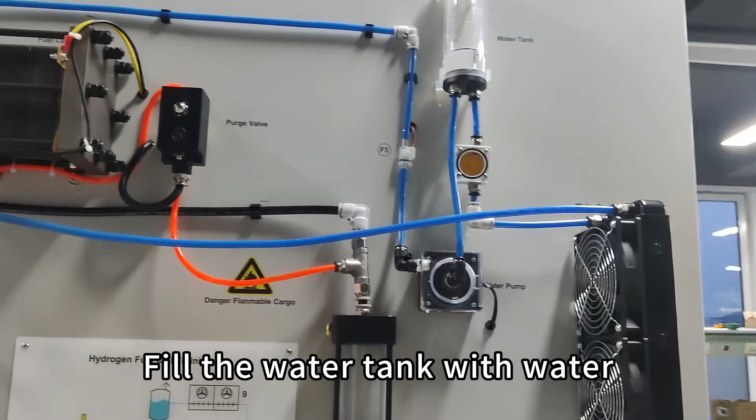Following is a test of the fuel cell. We need to fill the hydrogen tank with hydrogen and then adjust it to the appropriate pressure. The pressure should be less than or equal to 0.5 bar. Fill the water tank with water.

Adjust the electronic load clockwise to the maximum, which is 12 ohms. Next, power on. Here, I also pair this software. All are OK. The software uses a network cable to connect the communication port on the right side of the device to the communication port of this computer.

This is a software CD. It also comes with a USB network card, which can be used if the computer does not have a network port. Next we start from the touchscreen.

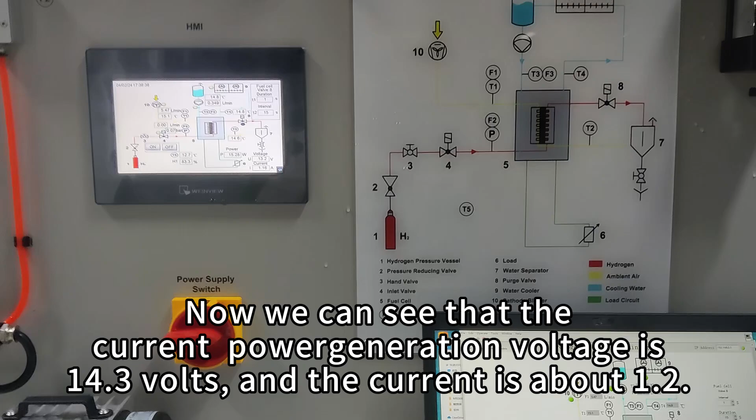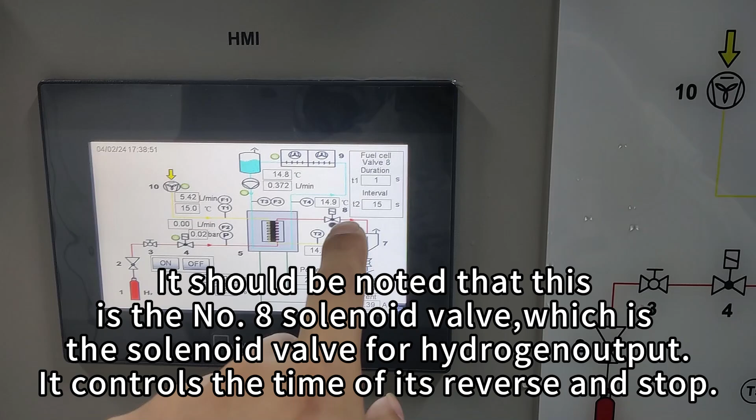Now we can see the current power generation voltage is 14.3 volts and the current is about 1.2. It should be noted that this is the number 8 solenoid valve, which is the solenoid valve for hydrogen output. It controls the time of its opening and stopping. Now it is on for 1 second, then closed for 15 seconds, then on for 1 second, and then closed

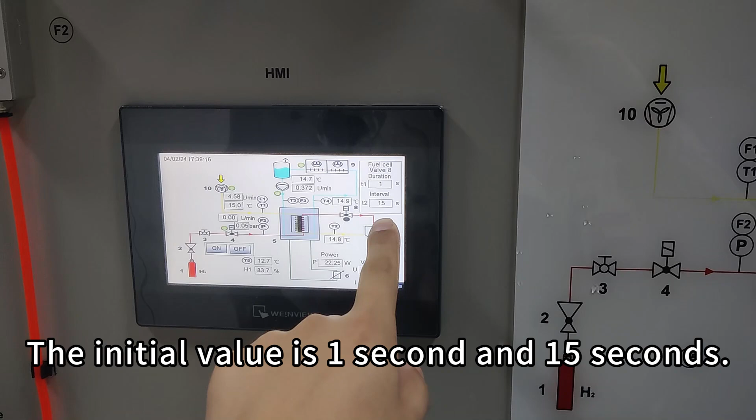for 15 seconds. It must ensure that after the hydrogen and oxygen react inside, when the concentration becomes lighter, it will be discharged again. The initial value is 1 second and 15 seconds. We can adjust it through the panel, and it can also be adjusted to 10 seconds. It can also be adjusted to 2 seconds here.

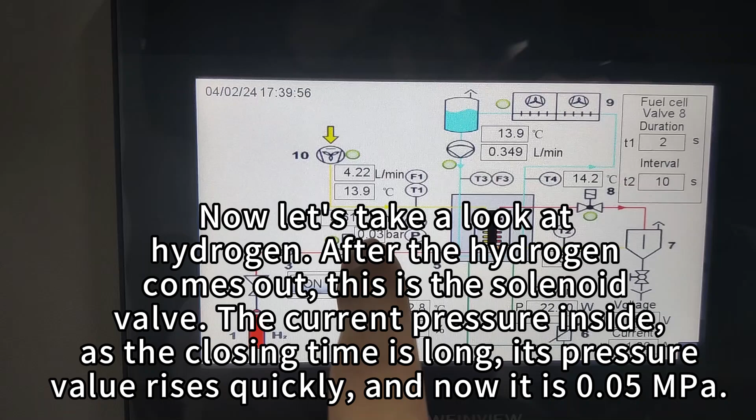Some current electrical parameters such as voltage and current will be displayed here. We can take a look at the current, voltage, and other parameters. Now let's take a look at hydrogen. After the hydrogen comes out, this is the solenoid valve. The current pressure inside, as the closing time is long, its pressure value rises quickly, and now it is 0.05. When the solenoid valve is open, the flow can enter, so the flow will flow out.

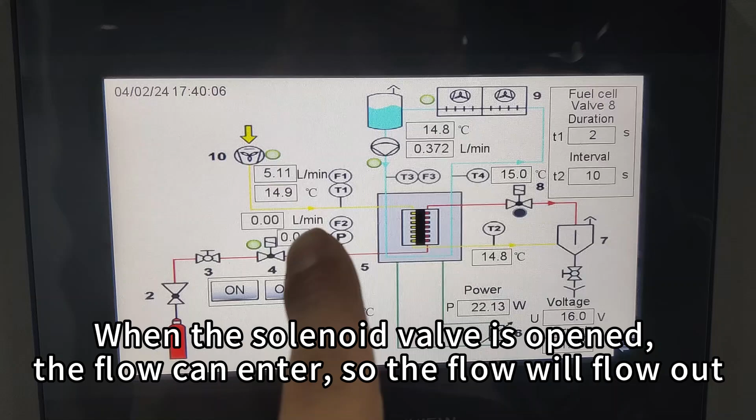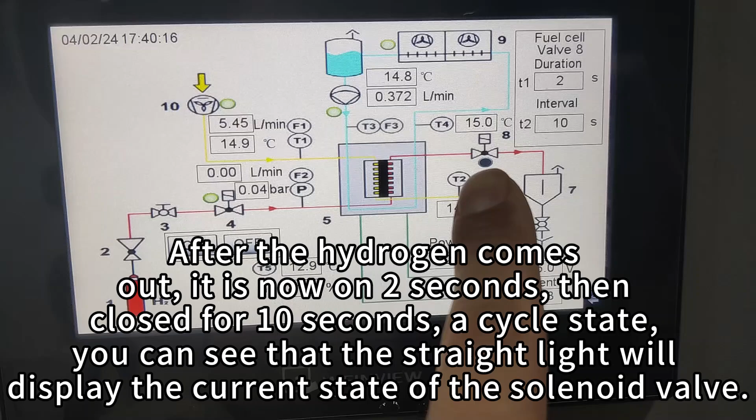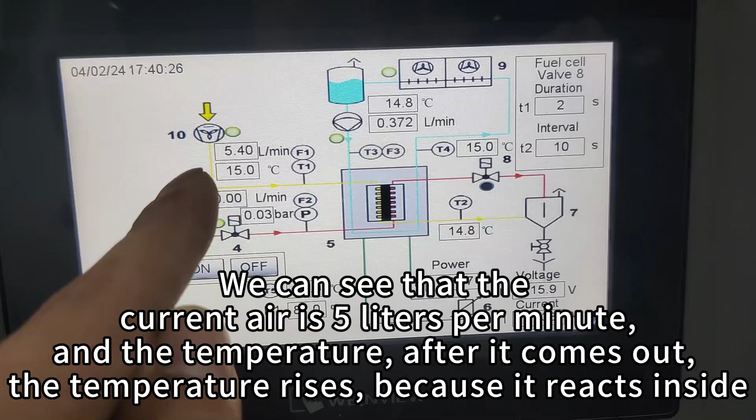After the hydrogen comes out, it is now on 2 seconds, then closed for 10 seconds, in a cycle. You can see that the light will display the current state of the solenoid valve. We can see that the current air is 5 liters per minute, and the temperature, after it comes out, rises because it reacts inside.

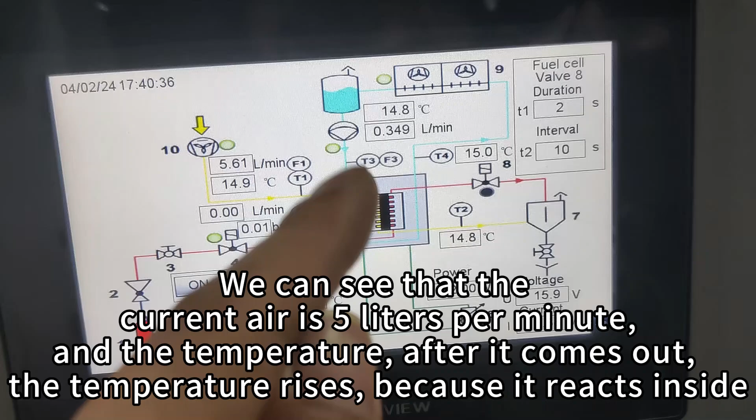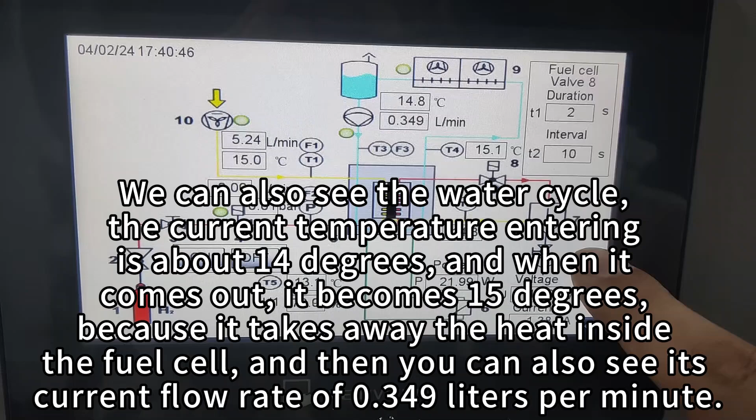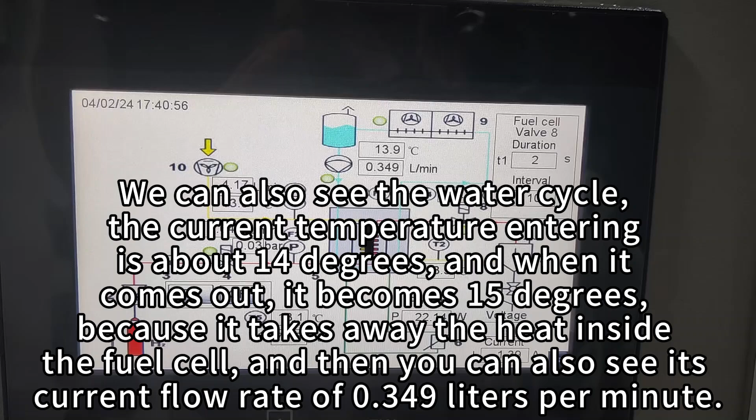We can also see the water cycle. The current temperature entering is about 14 degrees, and when it comes out, it becomes 15 degrees because it takes away the heat inside the fuel cell. And then you can also see its current flow rate of 0.349 liters per minute. We can also see here that humidity in the current room is 76.6%, and the current indoor temperature can be seen here.

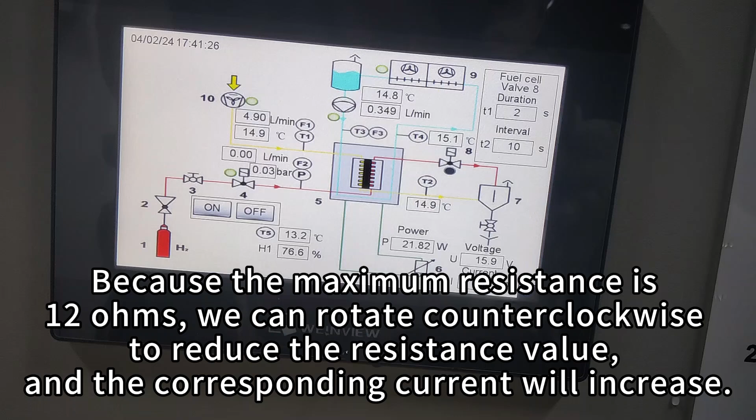Current electronic load current, voltage, power, and other electronic parameters will also be displayed here. Because the maximum resistance is 12 ohms, we can rotate counterclockwise to reduce the resistance value, and the corresponding current will increase. As we reduce the resistance value, the current will reach about 5 amps, and with a current of about 5 amps the power will reach about 60 watts.

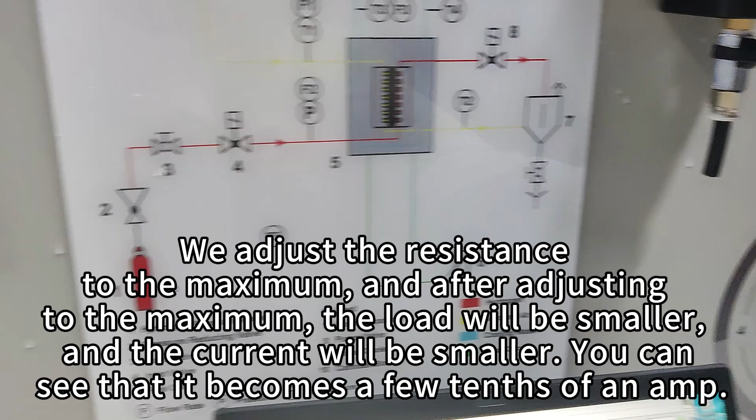But it will have this instantaneous voltage reduction because we are now connected to the hydrogen tank. We are using a hydrogen generator, and its hydrogen supply is limited, so when there is a large load, it will disconnect. We adjust the resistance to the maximum, and after adjusting to the maximum, the load will be smaller and the current will be smaller. You can see that it becomes a few tenths of an amp.

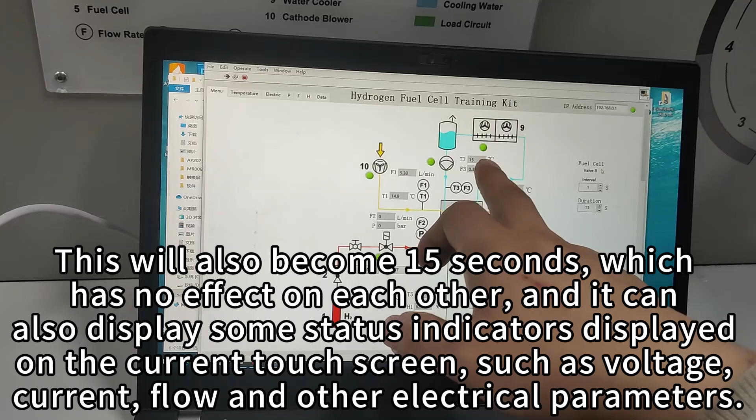Next, let's take a look at the software side. We can also change it here. After we adjust it to 1, the touch screen also becomes 1, and then we change this 10 seconds to 15 seconds. This will also become 15 seconds, which has no effect on each other. And it can also display the status indicators displayed on the current touch screen, such as voltage, current flow, and other electrical parameters.

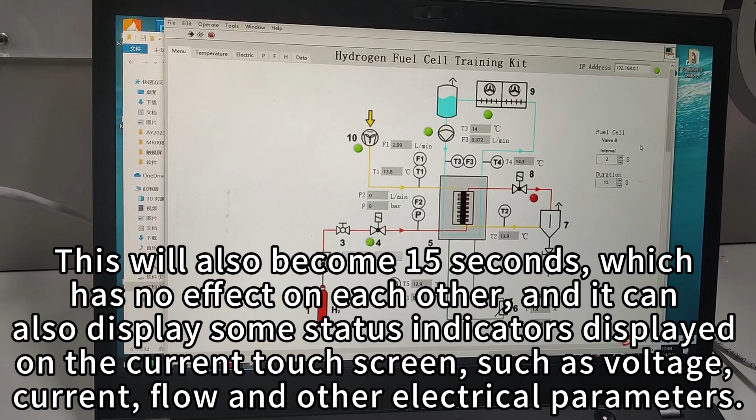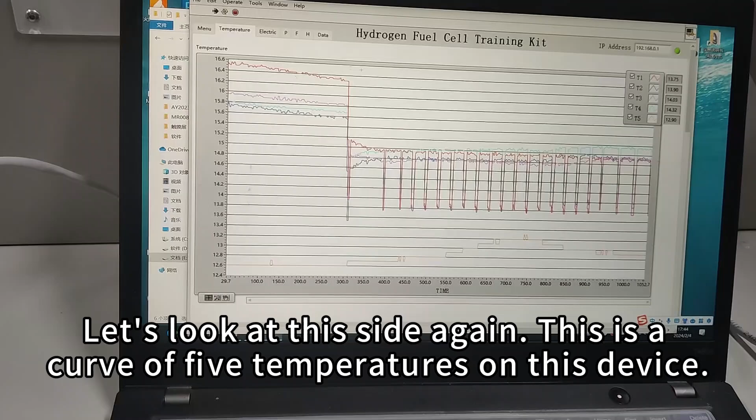We set it to 2 seconds, which means it will be on for 2 seconds. Some current electrical parameters such as voltage, current, power, etc. will also be displayed here. Let's look at this side again. This is a curve of 5 temperatures on this device. Then here's a curve of the voltage, current, power on both sides of the resistor.

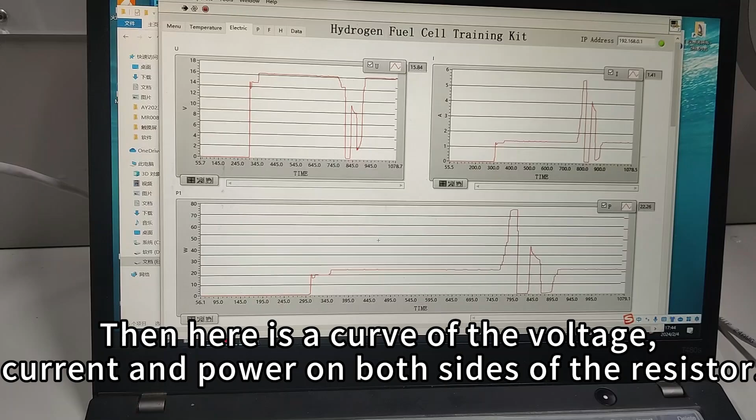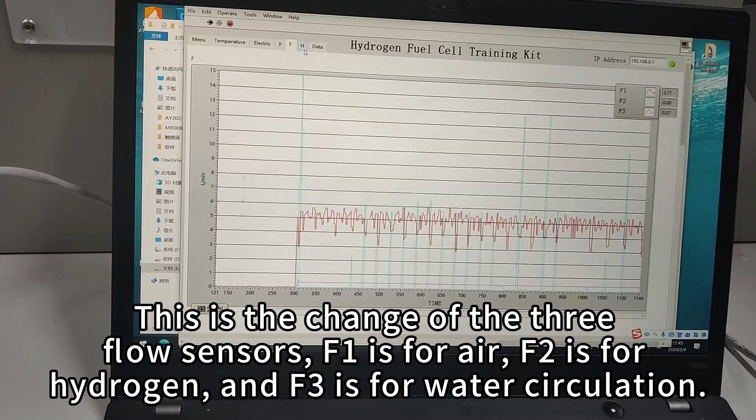This is the pressure sensor, which shows the change of pressure value in the hydrogen circuit. This is the change of the 3 flow sensors. F1 is for air, F2 is for hydrogen, and F3 is for water circulation. The following is a curve of humidity. You can also export this data table.

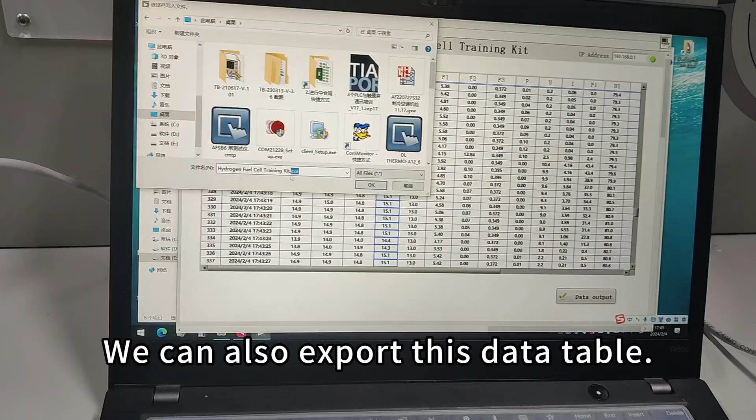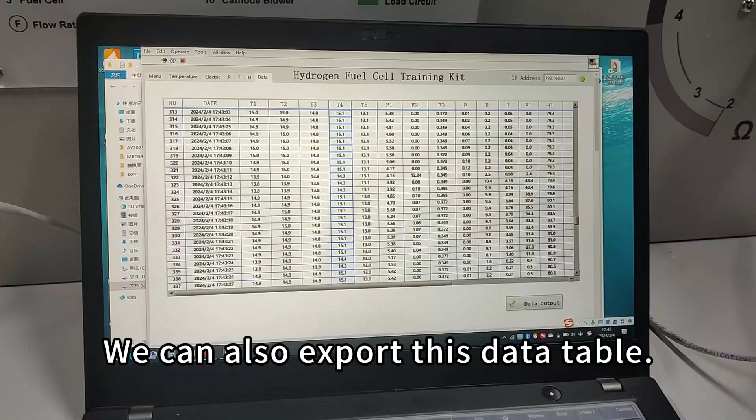This is the data table just exported. Let's take a look. The first column is the serial number, the second column is the time, and all the data after that are all the data in the experiment process, which can be displayed here.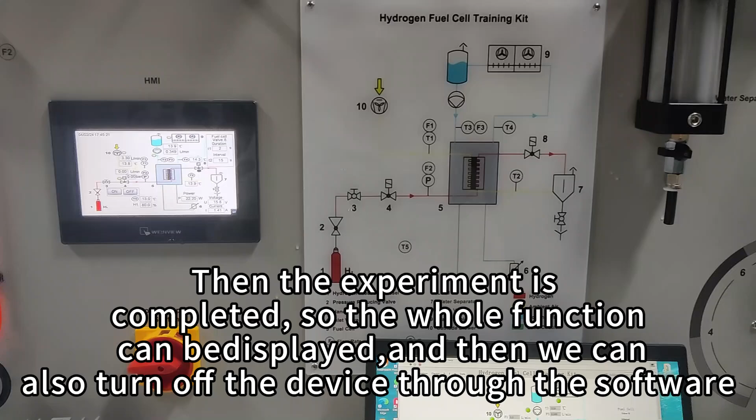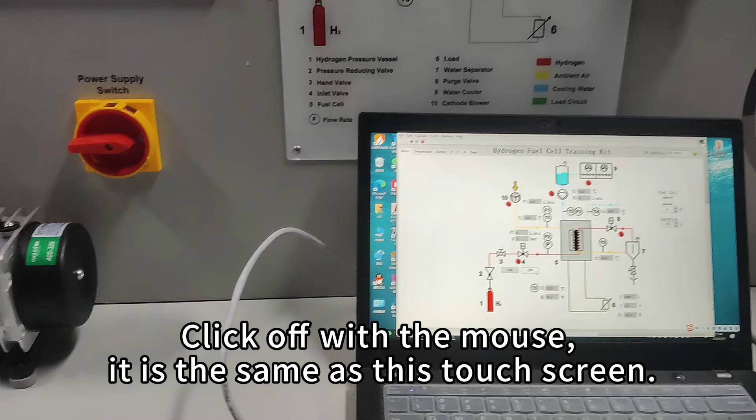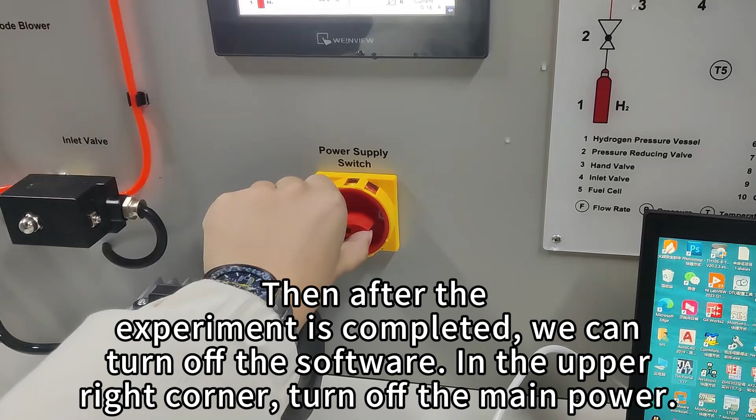Then the experiment is completed, so the whole function can be displayed, and then we can also turn off the device through the software. Click off with the mouse. It is the same as this touch screen. After the experiment is completed, we can turn off the software. In the upper right corner, turn off the main power. All the corresponding hydrogen hand valves are closed.